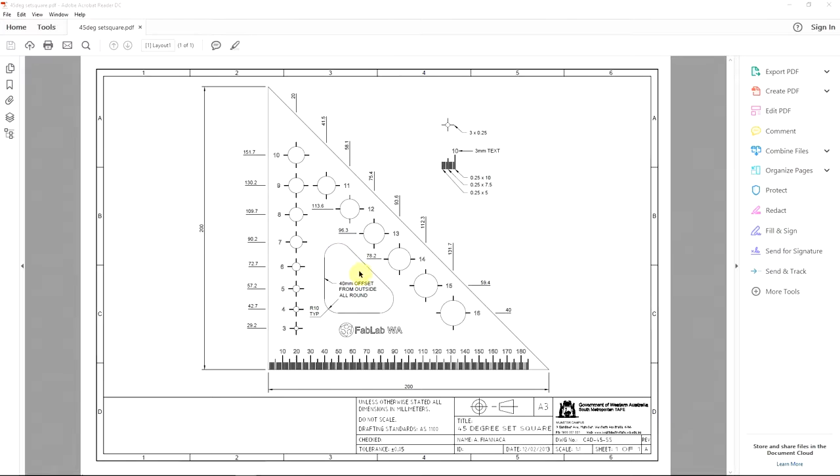The reason we're going to do that is because we're going to be using these items, or this section, to be engraved on a laser. So in order to do that, we need closed polylines, which is why we're using rectangles. We're also going to make sure that all the outlines and this section just in here are closed polylines as well, because we will be sending them through to the laser for cutting.

First thing we need to look at is the size of this. So we're looking at 200 by 200, and this is going to be a 45-degree angle. There's a number of ways we can look at drawing this. I'm just going to pop straight over into AutoCAD and let's get started.

Start with a line, and if I click and pull down, you'll notice I have ortho on. Just down in this bottom corner here, ortho, F8 is the quick key that toggles that on and off. I'm just going to pull straight down and type in 200 followed by enter. Then moving to the right, I do the same thing, 200, enter, and then using the close option just down in the command line here, I click on that.

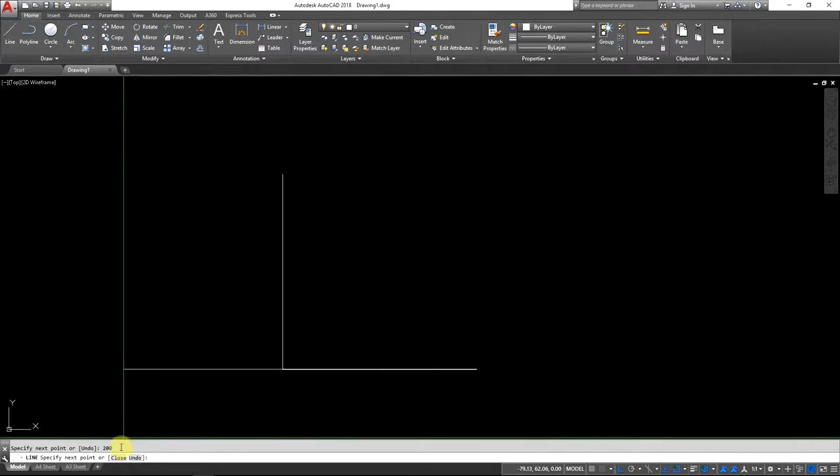Now that's drawn my shape. Now the thing you will see or notice is that these are individual objects.

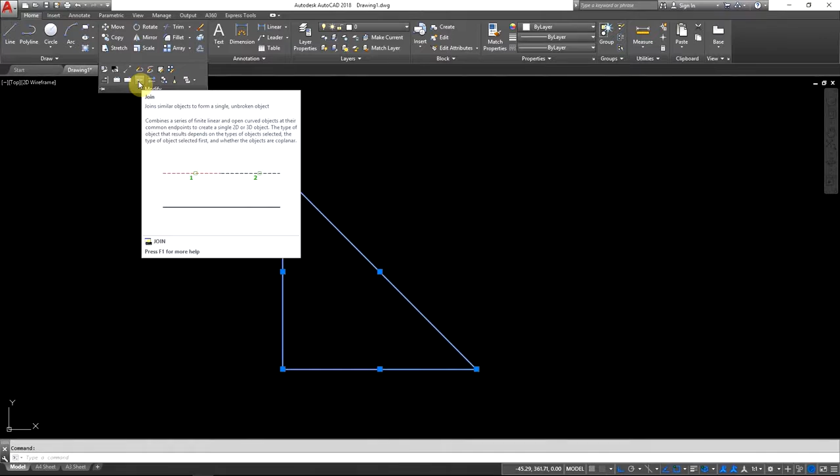One of the ways we can convert these to a polyline after selecting, and we can either do the tool before or after, but we can click on the modify pull down, and you'll just see these two arrows that are facing each other. This is the join tool. So if I select that, you'll see down in the command line it says 3 objects converted to 1 polyline. You'll find if you move over that and select it, it is now 1 object.

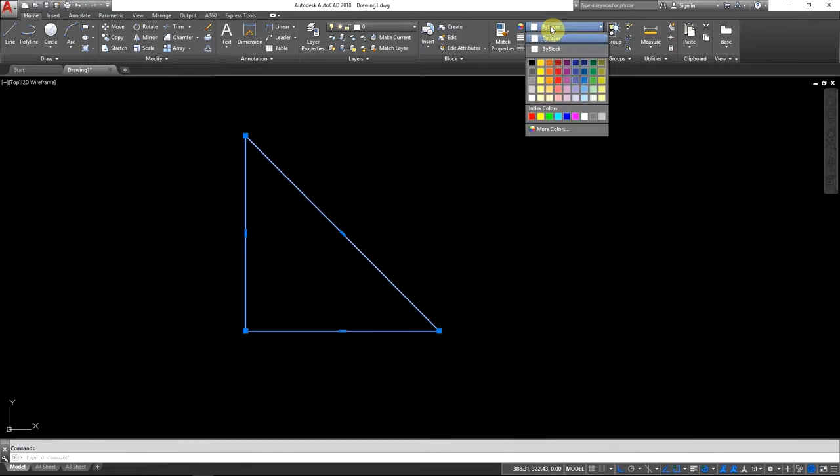Now we have our outline. Very first thing I'm going to do is change color just so it stands out from the rest of the drawing that we're doing. So I'm just going to go up here and choose a color that's easy to see. I've made that cyan.

What I'm going to do is pop back to the original drawing, which is this one here, and you can see this little note. It says 40 millimeter offset outside all the way around. So from there to there, there to there, and from this point down is 40 millimeters all the way around. You'll also notice that we have a radius, R meaning radius, of 10, TYP meaning typical. So these radii aren't dimensioned, which means they are the same.

So I'm just going to pop back to my drawing. And the way we're going to do that, we're not going to worry about drawing another triangle inside of this. We're just going to use this little tool up here called offset. If I click on that, you can use the quick key O and enter. That will do the same thing.

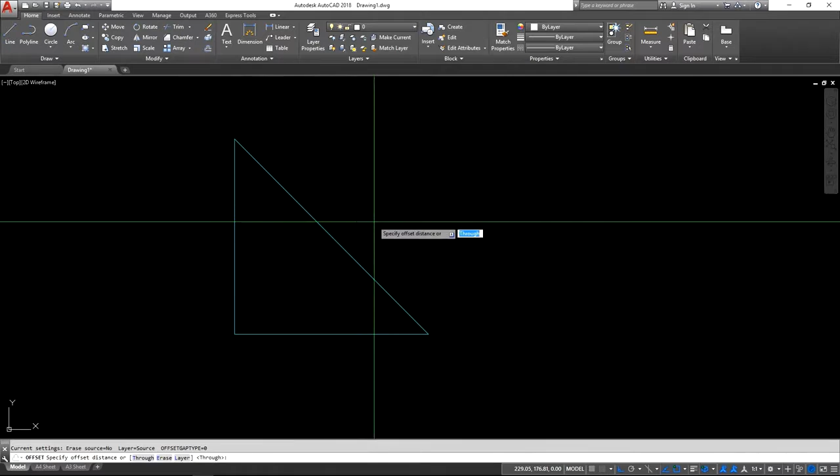The very first thing we need to look at is it's saying—I'm just going to pull this up a touch—specify offset distance. So it wants to know how much do you want to offset by. So what I'm going to do is type in 40 and enter.

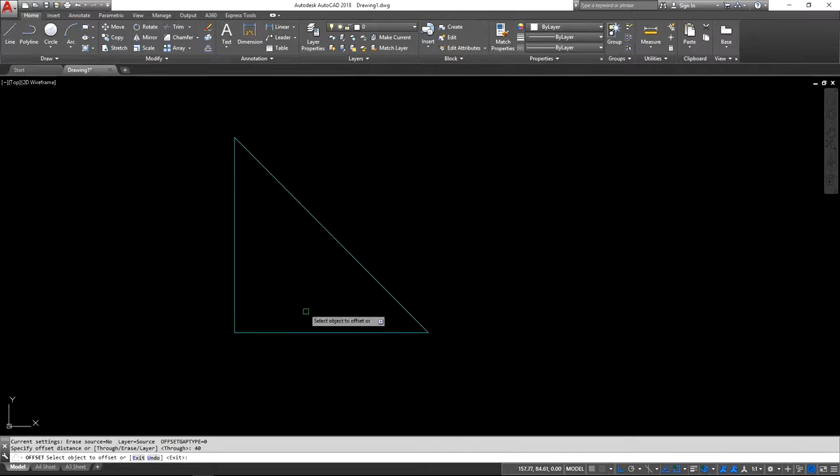It will now say select object to offset. So you click on the object, and you'll see if you move your mouse inwards, it offsets 40 mil all the way around. Because it's a polyline, it will automatically resize it. If I move outwards, I get it 40 mil bigger all the way around. So I'm just going to pop back inside and single left click and enter to finish the command. So there we have now our inside triangle.

We can check to make sure that we've got the 40 millimeters in there by using the distance tool. You can type DI in the quick keys, or come up here and click on distance. I'm going to select the midpoint to perpendicular, and straight away you can see the distance there is 40. All right, so I'm happy with that.

The next step is to put the radii in these corners. Now we know based on our drawing that radius was 10. So clicking up back to where our chamfer tool is, we're going to click the pull down and choose fillet. First thing, looking down in the command line, you can see our current radius is set to 0. So we need to change that by clicking on the radius option or typing in R and enter. Specifying fillet radius, we're going to put 10 and enter. So the radius is now set to 10.

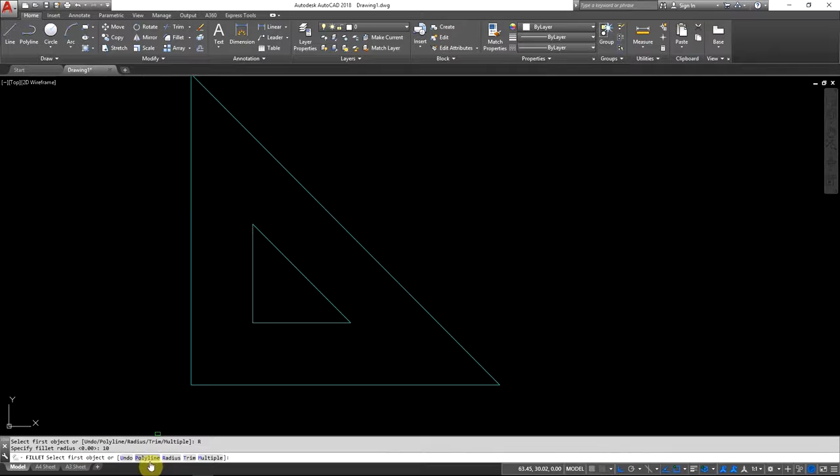The next thing you want to do is ask yourself, do I want to fillet every single corner of this object? In this case, the answer is yes. The next thing we need to know is, is this a polyline? Obviously, because this was a polyline and we've offset it in, this is also a polyline. So knowing that, we can come down and click on the polyline option. This is just going to save us from having to fillet each corner - it will do it all automatically. So I click on polyline, it says select the 2D polyline. I click on that, and bang, there we go.

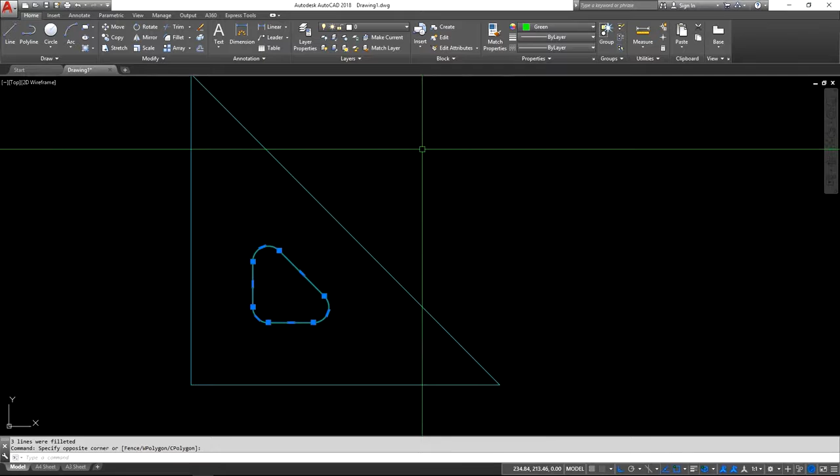Now, I want this to be an internal cut, and I want that to be an external cut. So on the laser, I'm going to set different colors so these come through as different layers. That way, if I need to tell the software to cut one layer before the other, we can do that quite easily. So I'm going to make that green. All right, so there's our basic shape.

The next thing we need to look at are these little increments here. So what we're going to do is start with one increment right on 0, and we're going to draw one of these little rectangles, as you can see, 0.25 by 5, and we're going to put the midpoint of the bottom right on the 0 point there, so right on that corner.

So jumping back into CAD, we start by using the rectangle tool. I'm just going to zoom in down here. Now I'm just going to draw it anywhere at this stage, and I'm going to use the measurements of 0.25 and 5. Okay, so that's going to give me my little rectangle. Before I go any further, I am going to change the color - this is going to be different again because we're going to use this one for engraving.

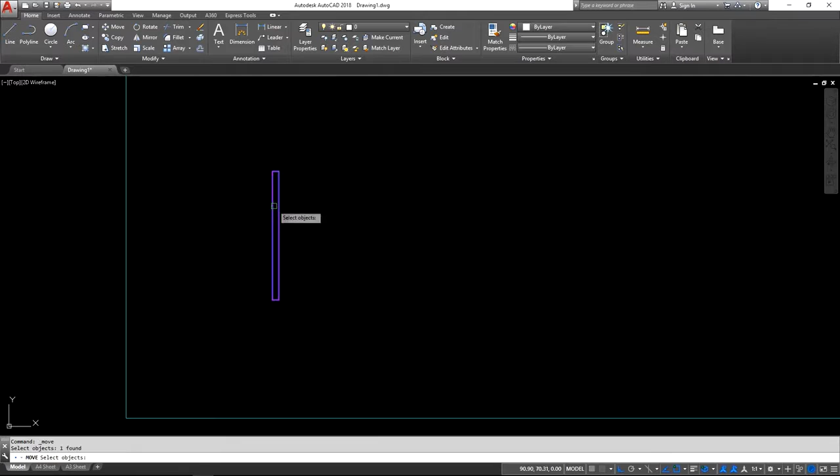Okay, so once we've got that in place, what we're going to do is click on the move tool just up here, so move, select the object, enter, and making sure all your O-snaps are on. So the little O-snap button down here, you can see we want all of these ones on. Now I want you to leave nearest off at this stage, but we do want to make sure they're all down to at least tangent.

And then I'm going to zoom in - make sure you zoom in. Don't try and select your midpoint from all the way back out here, as you can see, it's quite hard. So always zoom in by rolling the scroll wheel forward. Select the midpoint by clicking, zoom back out, and then we're going to move down.

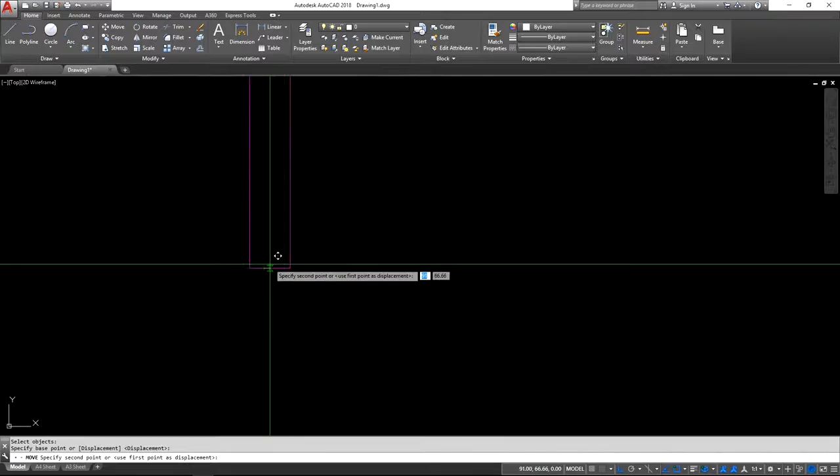Now, one thing I will mention at this stage, I've still got ortho on, and you can see as I'm moving down here, and I want to click down here, it looks like my item is just going to move straight to the left and stay up at that height, but it actually won't, because I'm specifying the endpoint. I'm moving it from the midpoint to the endpoint, so it will put it on the endpoint. So I'm just going to left click there, and as you can see, it's dropped down.

Now the next thing is we need to make copies of this. So we want 10 of them out over here, but we've got to take into consideration this is 0, so we actually need 11, and they're all going to be 1 millimeter apart.

Now the easiest way of doing this, we could go through and copy 10 times and all that sort of stuff, but under the copy tool you'll find there's a handy little tool, or option, called array. So I'm going to click on copy just up here. CO or CP is the quick key. I'm going to select my object, press enter.

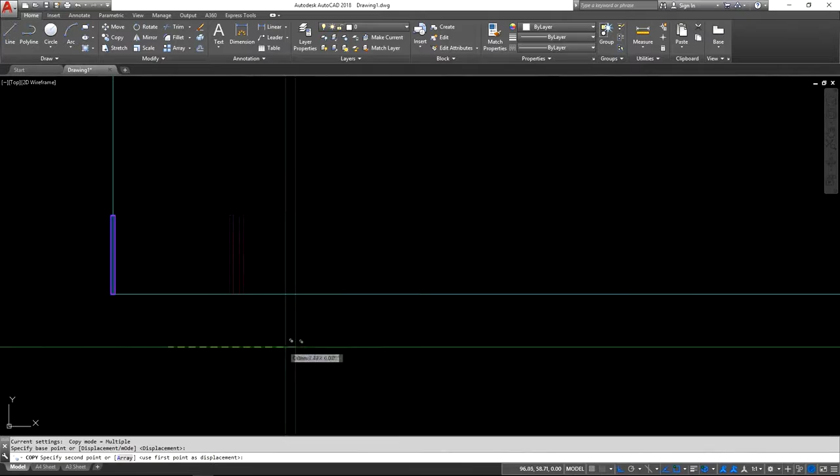Now it's going to ask for the base point, so this is where do you want to copy it from. Because I'm just copying straight in a line and I've got ortho on, my base point can really be anywhere because I know the distance I'm moving. So I'm just going to click out here somewhere away from everything. As you can see, I can copy it and move it in the distance and direction I want to go.

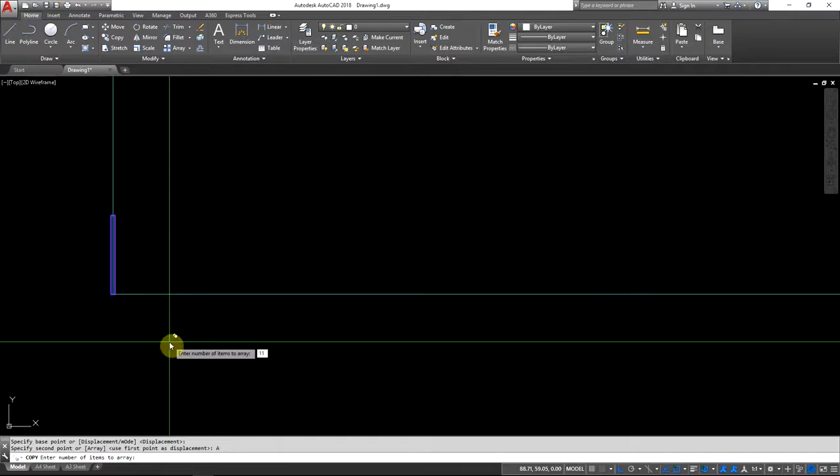Now before we do that, we're going to use the array option just down in the command line here. I click array, and then where it asks for the number of items, we need 11, because we've got to remember 0 is also counted.

So 11, enter, and as you can see, if I pull my mouse out, I can adjust that. Now it wants to know the distance between each one, so I'm just going to type in 1 for this. If you don't know the distance between, but you know the distance in total, you can use the fit option - that's something we'll look at a bit later on. So just moving in the direction, type in 1 and enter. Enter again to finish. You'll now see that we have our 10 increments.

Okay, they're all the same size. We don't need 0 anymore, so I'm going to select that and click on erase. And there we have it. Now popping back to our sketch or our drawing, you'll see every fifth increment is...

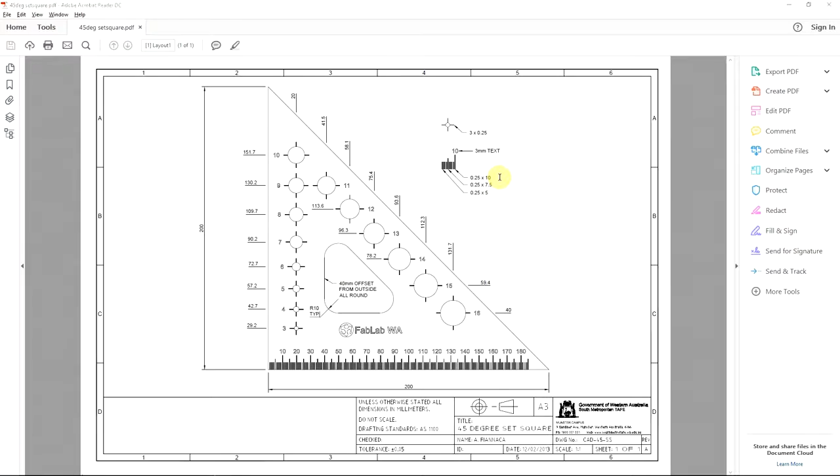7.5 mil high, and every 10th one is going to be 10 mil high. Now we're going to do that by using the stretch tool, or we can stretch with grips. Probably at this stage it would be easier for you just to stretch with grips. I'm going to show you different ways of doing it, and it's up to you how you want to have a go. But the stretch tool will be quite invaluable later on.

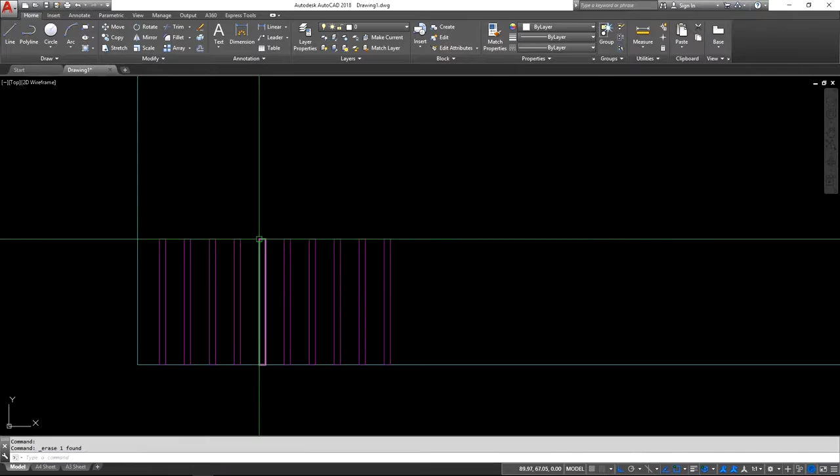So from this stage, we know this is 1, 2, 3, 4, 5, so this is the one we want. I'm going to select it. Zooming in again, we're going to select the mid grip, and with ortho on, we're just going to move up and type in 2.5. Okay, zooming back out, press escape.

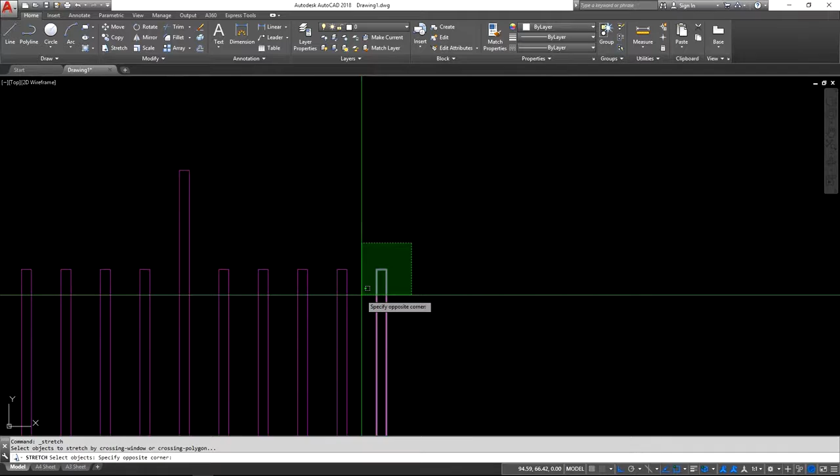It's that easy. Okay, the other way we can do this is by using the stretch tool. So you'll see up here, I'm going to click on stretch. With the stretch tool, this works slightly different - what you're going to have to do is draw a window over the section you want to stretch. Now the way the stretch tool works is anything that is entirely inside the box, so in this case just the horizontal top line, will move. Anything that is inside and outside the box, so in this case both the vertical lines, they will actually stretch, so they'll change shape. So I'm going to click there, press enter.

Now it's going to ask for the base point. Again, because I'm using ortho, I'm going to click anywhere, and then I just move in the direction, type in the distance. In this case, we need to go 5. Okay, zooming back out, and there's your increments. As you can see, it was probably much easier just to use your grips - with ortho, you can click on the center grip, pull it up, type in the distance. Whereas this one, there was a lot more work involved using the stretch tool. However, you'll find once you get used to that, it's actually fairly easy.

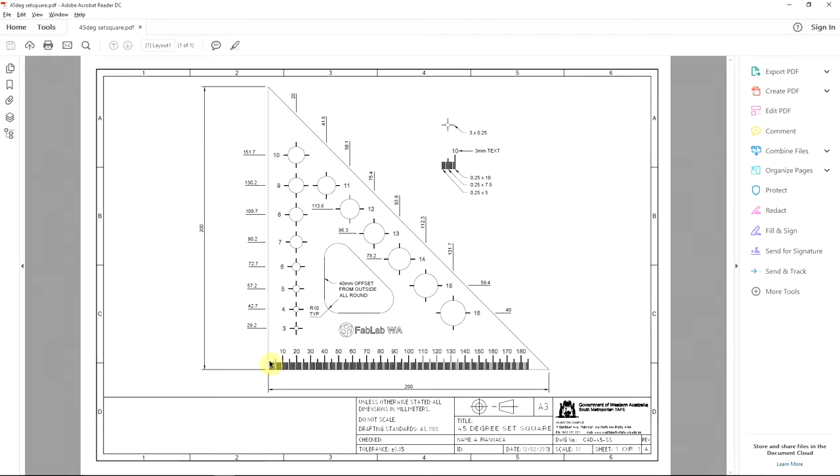The next step, looking at the drawing, we need to put these numbers in there. So we're going to start off by putting some basic text in there, and then we're going to use our copy array tool again to do all the increments. Okay, so up here, what we're going to do is we're going to use the default settings.

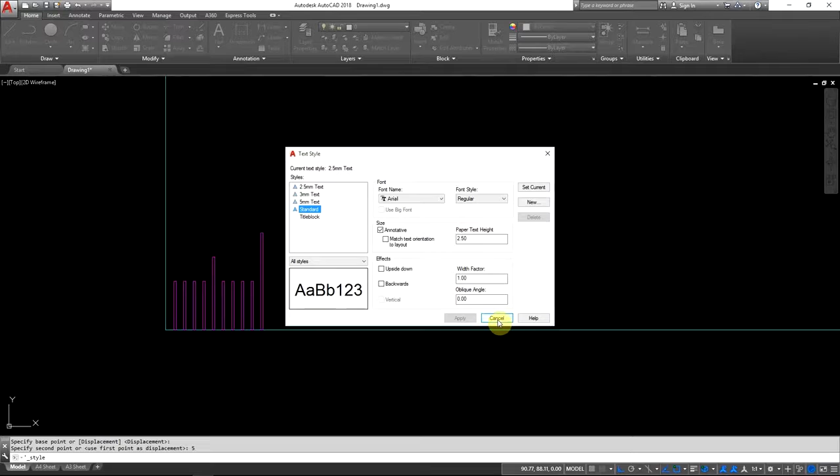Later on we're going to click onto annotation and have a look at all these. I'm just going to change mine over to the default settings. You can ignore this section at this stage, and all I want you to do is come and click on the A up the top there.

This is going to be doing multi-line text. Now with this, what you're going to do is just draw a window. You can put this anywhere at this stage, so you can just draw a window like that, and then you're going to type in 10.

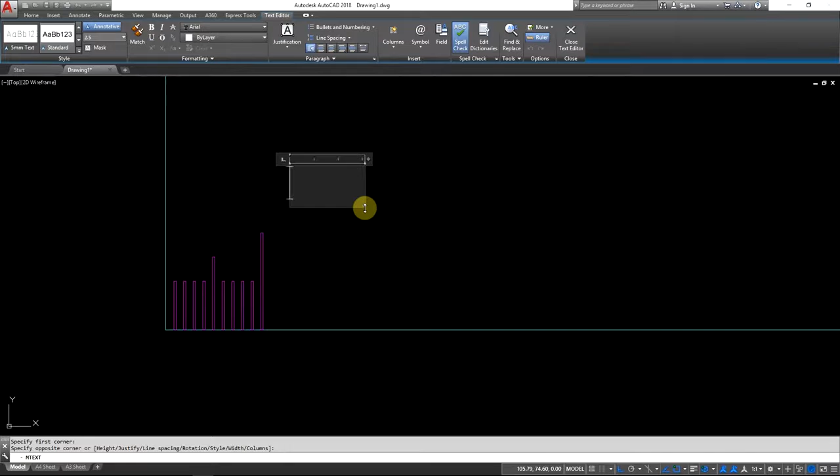I'll explain all the text in a later tutorial. Once I've done that, I'm going to select the text, come up to justification, and choose middle center. Click outside of it, and then select it.

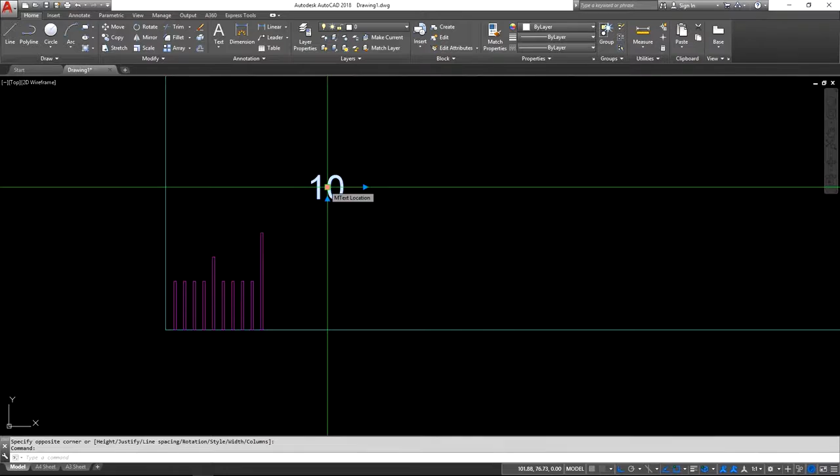You'll see there's a grip just here, and that's the middle center. So I'm going to click on that and place it on the midpoint of that top line. I'm then going to select it and move straight up. In this case, we're going to go up 2.5. So there is our text in place.

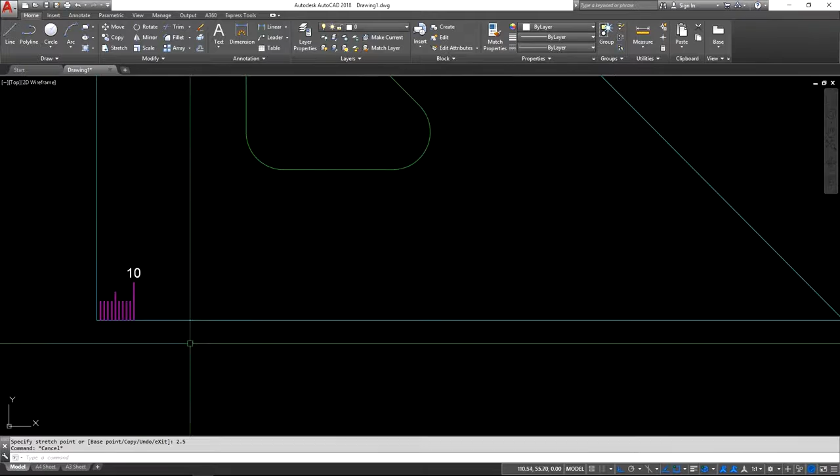Now the next step is to take all of this, and we're going to use the copy array tool again, so up under copy. Well actually, before I do that, I'm just going to change the color of the text, because that's going to be engraved as well, so we'll make that magenta.

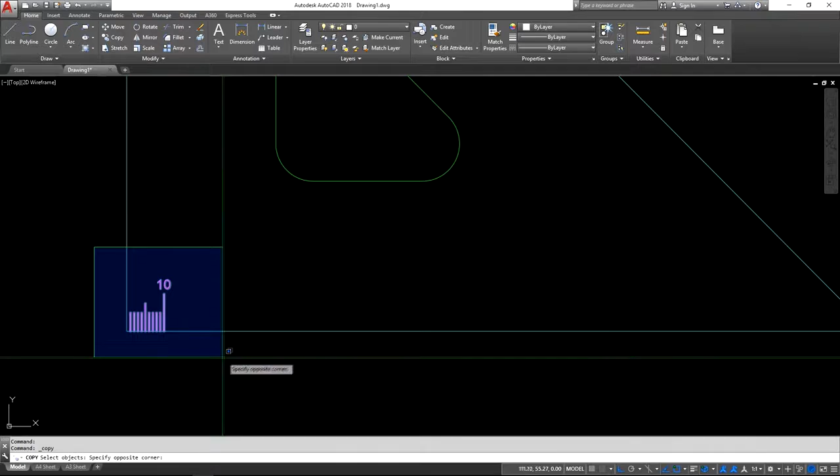Using the copy tool, this time I'm going to select all of it. Notice I'm using the blue window rather than individually selecting all the green window. Right click, and now for the base point of displacement, I'm going to select our 0 point. I'm then going to use the array option, and in this case I'm going to put in 19, and as for the distance across, we're going to type in 10. Enter, enter, and there we go.

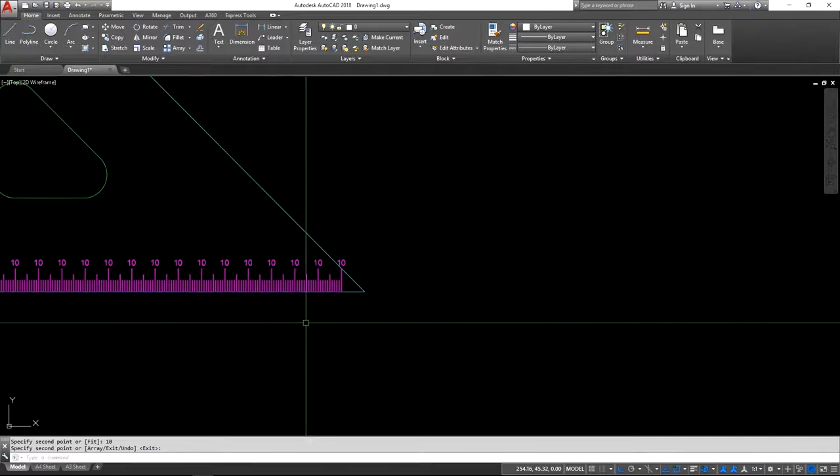Now what I'm going to do, just panning over to this side, I'm just going to delete this last increment here, or if you like, we can actually just stretch that one down 5. So we'll go down 5. That way that's our last increment, and we can delete this one here. Okay, so there we have it. There is all of our increments along the bottom.

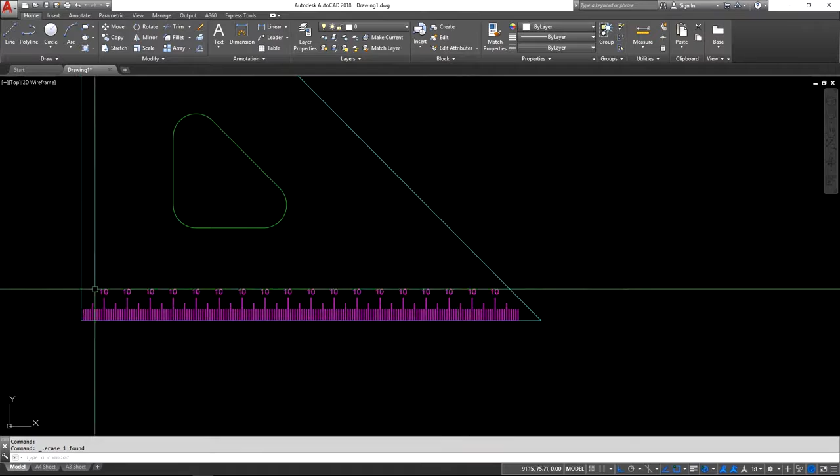Now the last step we're going to do in this version of the tutorial is we're just going to auto number all of these, so we're going to go and make them into the order that we want. After that, next tutorial we'll go through and we'll put in all the circles and bits and pieces.

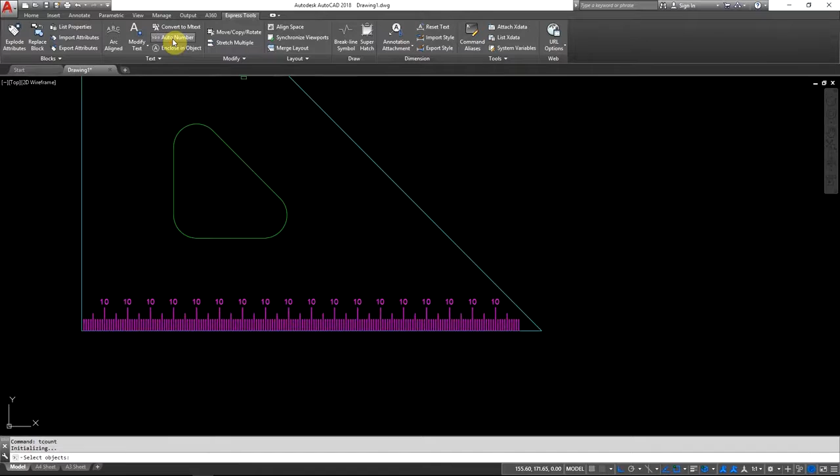Cool, alright, so moving on, we're going to do this next step. We're going to use the Express tools, so we click on Express tool. Just under here you'll see auto number. Okay, so I'm selecting that and looking down here, selecting objects.

I'm just going to do a blue window again over all the text. Now really, you could go over the whole lot, it doesn't matter, it's only going to select the text. I'm then pressing Enter. Now looking at this, I want to choose the X axis, so that's the order that we're selecting in. So it's going to go along the X direction, that's from here to the right.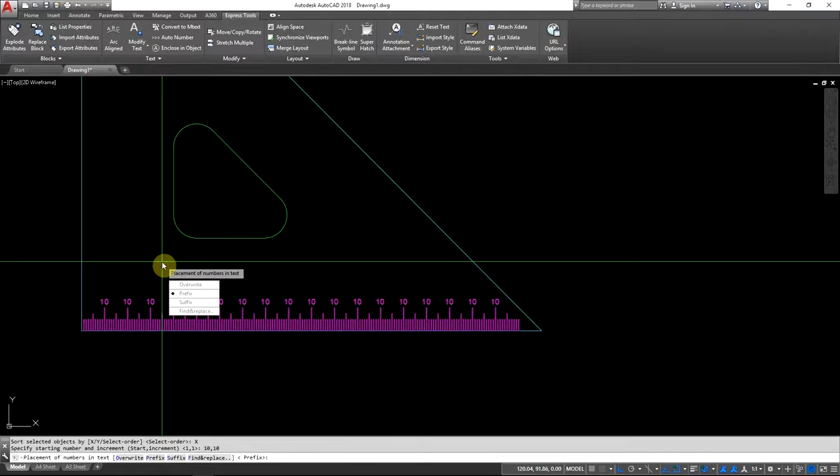So I select X. Now next, it's asking for the starting number, so the starting number and the increment. In this case, the starting number is going to be 10, so 10, comma, and the increment we want to go up in is 10 units, so I'll put in 10 there. Enter, and then here we're going to overwrite, because we want to overwrite the existing one. So I'll click on that, and as you can see, that auto numbers it all.

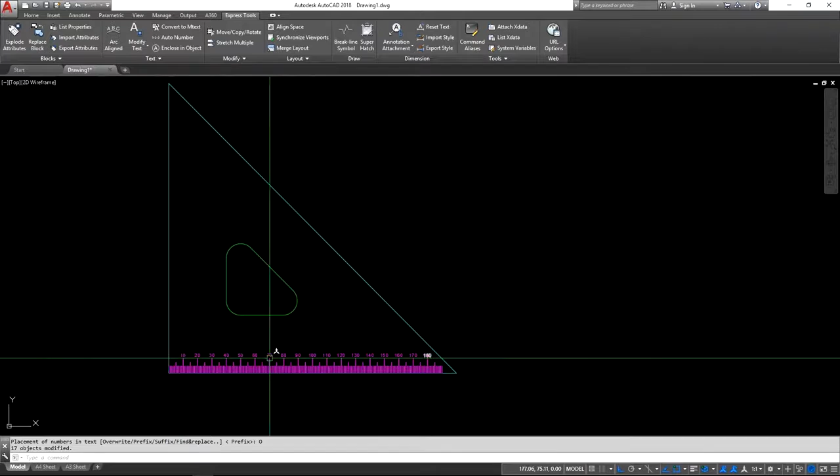Okay, so I'm going to leave it at that for this tutorial. As I was saying, the next tutorial we'll go through and we'll put in all of these circles with all the increments and bits and pieces, and then we'll look at how we can convert the text, which is a vector, into actual vector lines, so outlines like this, because our laser software won't read the text, so when you bring it in, it's just going to be blank.